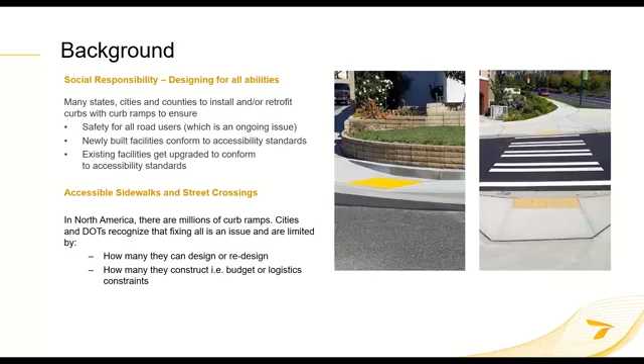So why did we decide to develop a software to help the designers? Well, just a really quick background on how we got started with this software itself.

Actually, a couple years ago, around two to three years ago, we started approaching a few of our clients to ask them what they found difficult when it came to designing curb ramps, or designing intersections and infrastructure. A few of them voiced their concerns and gave us their opinions, but one of the more prominent voices was Caltrans, and they expressed that designing curb ramps was actually very troublesome. Even though it's such a small infrastructure, designing it can take a minimum of one hour, and even the most complex one can take about a week or more.

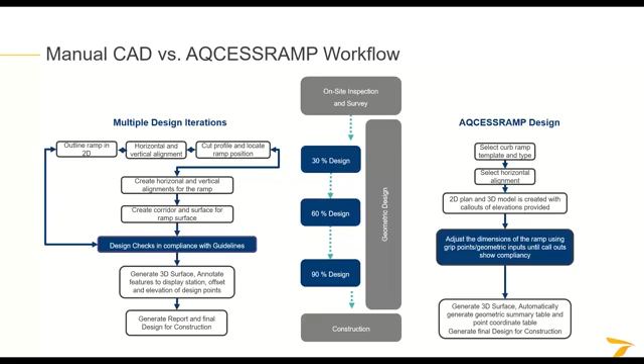So I mentioned that Caltrans was one of the prominent voices that we heard, and this entire software actually started off as a collaboration with Caltrans as well. But it wasn't just Caltrans that helped us out throughout this entire process. We actually had various DOTs have sneak peeks of this process. They would give us their opinions on what they liked, what they didn't like, and then we adjusted the software, made changes based off the various DOTs' opinions.

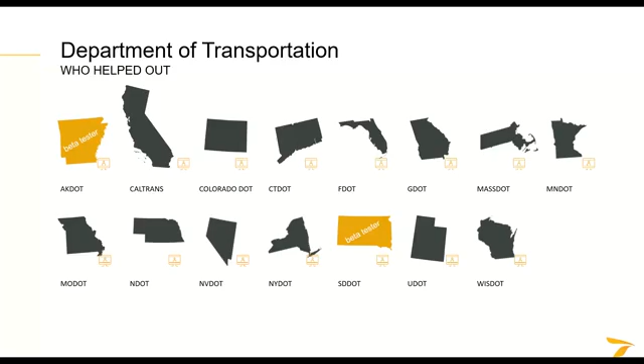We were actually very proud of it because the software was not just our software. It's actually a collaboration of many DOTs and many AEC firms as well, so that we're able to produce a software for the people that was collaborated and worked together with the engineers and designers throughout the entire development process.

Okay, so I did quite a few introductions of AQCESSRAMP already. I've provided you with quite a bit of information, but just a quick recap of what AQCESSRAMP is. AQCESSRAMP is a tool that will help you quickly and efficiently design your curb ramps. We provide you with a simple UI and workflow so that you'll be able to easily maneuver through the software.

You'll be provided with multiple workflows, so whether you're doing a brand new design or retrofitting an existing curb ramp or sidewalk, you'll be able to design 2D and 3D curb ramps at the click of a button. We have built-in templates for both curb ramps and curb types, so that you can mix and match to customize your curb ramps.

And with software feedback of slopes and elevations, you'll be able to know whether your curb ramp is compliant to whichever standard you're using, whether national standards such as FHWA, ADAAG, and PROWAG, or state-specific standards. And even if you're working with a city, you can create your own standards as well, which I can show you later on how to do.

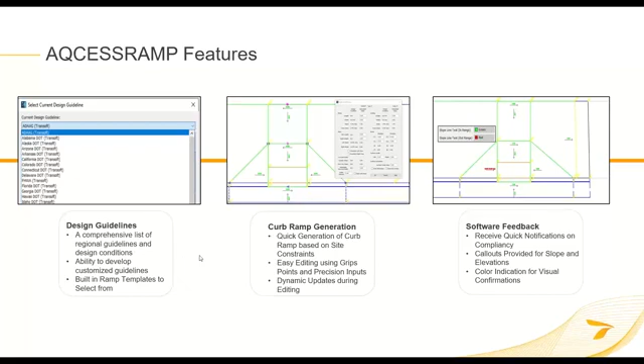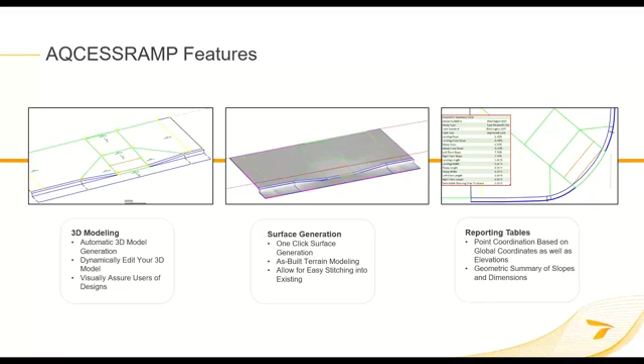Again, we have 3D modeling, 3D surface generation, and we also have reporting tables so the user can quickly grab their point coordinates for the key points of their curb ramp design, getting their X and Y as well as elevations. They'll also be able to generate a geometric summary report based off their curb ramp design that provides the geometry as well as the slope of their design.

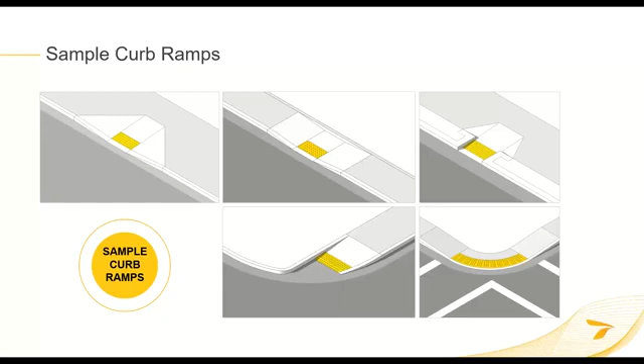And again, I mentioned we have quite a few guidelines from both the federal level and state-specific levels, and we actually have all 50 states in our software. We also have FHWA, ADAAG, and PROWAG in there.

So now I'll be jumping into the technical demonstration portion of today's webinar.

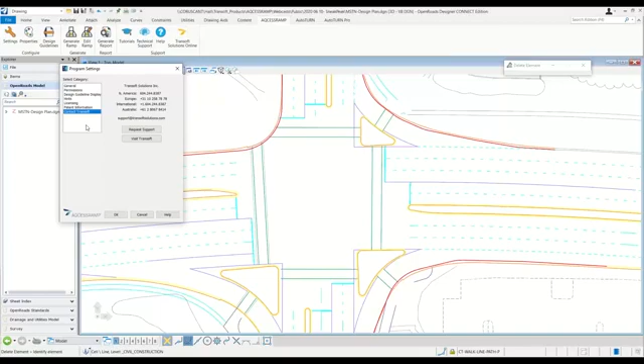Next, we have our properties. This is where the user is able to specify what level they would like each of the elements of their curb ramp to be placed on, whether you want them all on a single layer or a very specific layer, you can set them here.

As you can see over here in curb ramp, we provide the user the ability to specify colors and line styles, as well as the levels and transparency for the ramp, the landing, the curb, sawcut lines, the conform lines, the detectable warning strips, as well as the planting and boulevard. So if you have any state-specific line styles or colors that you would like to use, you can modify them here so that the curb ramp that's generated will conform to whichever standard you're using.

Same goes for annotation, for the elevation callouts and the slope callouts as well - you can set it all over here really quickly. And you can even save property settings and load property settings by simply extracting them, sending to another user, and they can just load it up over there.

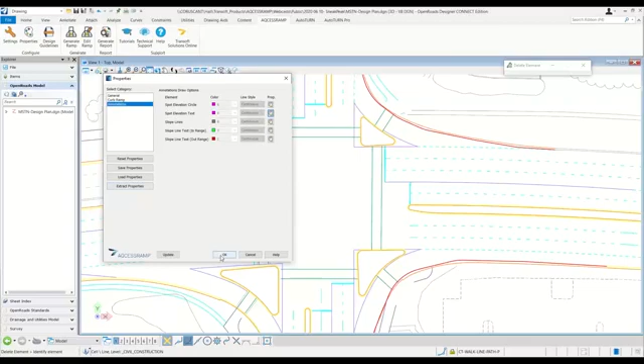Next, we have our design guideline. This is the main part of our software, the one that we're most proud of. As you can see, we have all 50 states, and if you view one such as Michigan DOT, you can see that we have quite a few various types available, such as type C, type D, and the F.

Rs, RF, and P - so you can see we have a parallel, we have the various perpendicular curb ramps, and using the directional, we can actually create a blended transition for the type D. We also have a few other various types. You can see that we can set the initial value so that right from the very beginning, you can already have a compliant curb ramp.

You can also set the type of curb you would like to use. In addition to the initial values, you can also set the design conditions - what's the minimum and maximum values that will allow your curb ramp to be compliant, and what's the minimum and maximum geometry and slopes that is acceptable for whichever standard you're using.

Such as for Michigan, we have a minimum width for the ramps and the landing, a maximum slope for the ramp, the cross slopes, even for the flares, and for detectable warning strips. These are all values that the user can set themselves. Obviously, for state-specific guidelines that ship with the software, we gray it out so that the users are not able to modify it.

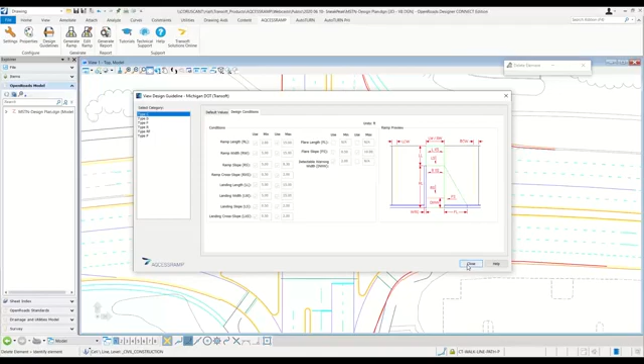However, if the user does want to modify or create their own, they can simply start a new one from scratch, or they can copy an existing one. So if they're to start a new one from scratch, let's say we want to create a new Michigan one - click OK, and we can add the various templates available. You can see over here we have the various templates for the users to use.

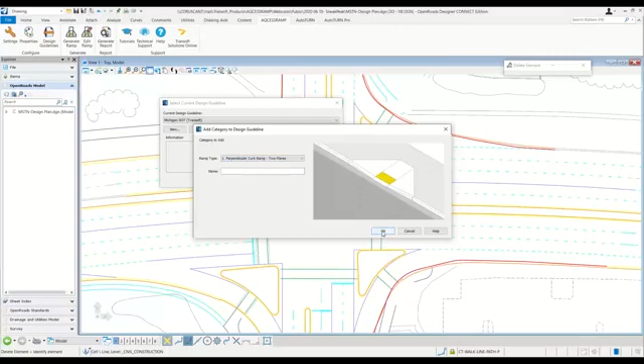Okay, and the user will just be able to simply click OK and put a name down for it. Let's just have a really quick, simple name.

And then they'll be able to start with the various initial values that they would like to use. As you can see, even for curb standards, we have quite a comprehensive list available. Even for Michigan, we have various curb templates available so you can mix and match depending on where you're designing your curb ramp.

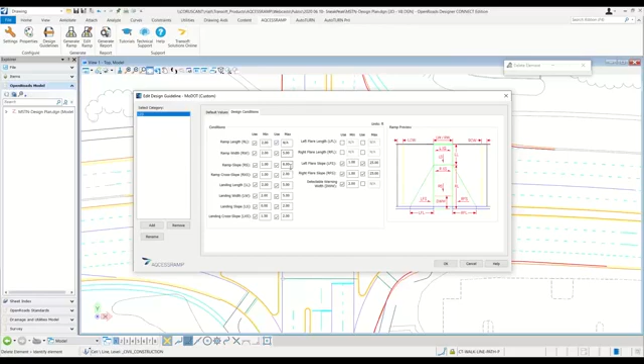Again, for design conditions, you can select which ones you want to use. If you don't need a maximum, you can select it off, turn it off, but you can set in the actual values yourself. So that's all very, very easy for users.

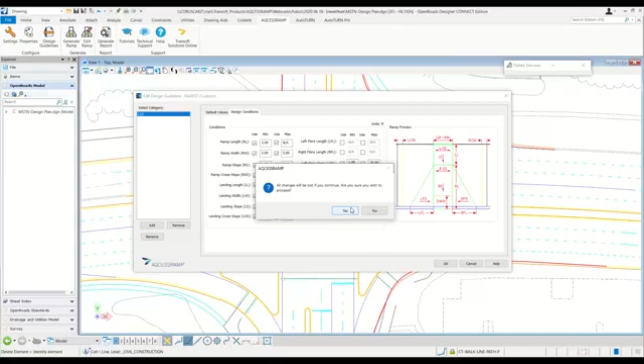We have state-specific standards, but we understand some counties or cities have their own standards as well. So you can actually create your own standards for the city or county. Or if you're not sure how, or you're having troubles creating your own standard, feel free to let us know which city or county you would like your standard to be for, and we can actually create it for you and send you a file for you to simply import into your own workstation for you to use. And even yourself, if you create one, you can simply export it so that other people can use it too. So that's very easy for you as users.

Okay, so we're going to close it here. Next, we have the ability to generate and edit the curb ramp, and then we have the tool to generate the report. So we need a curb ramp to be able to generate a report. We also have the tutorial, so we have quite a few tutorials for users to use. For when they're first starting, it will just take you through the steps of generating a curb ramp. And then we also have the technical support and a help section. So if there's any terminologies or features that you're not familiar with during your design, feel free to go into the help section and you'll be able to look it up.

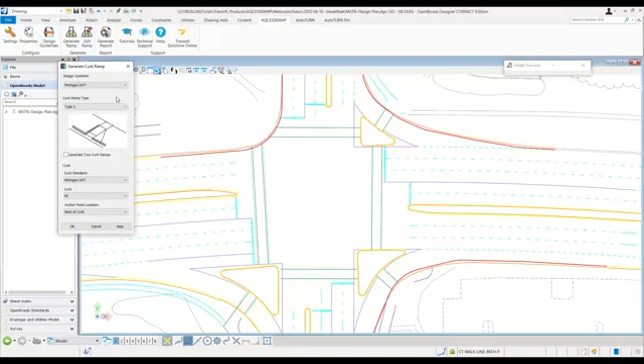All right, so let's get started with the actual generation portion of the software. So we're going to generate a curb ramp. As you can see, with Michigan, we can decide which type we want. Let's go with the simple type R. So let's go with an R. Okay, let's go with type F, the most basic perpendicular curb ramp, just to show you guys what we're capable of at the moment.

Again, we can select which curb standard we would like to use, which curb type, and then we can select the anchor point. The anchor point means that the curb ramp is anchored to the curb geometry, but what that curb geometry represents is up to the user. So they can select if they want to represent the back of curb, the face of the curb, the flow line, or in some cases a gutter edge if they want. So we can select a gutter edge if we choose to do so.

And we also have the ability to generate two curb ramps at once. So if you're at a corner where you need to generate two curb ramps at once, you'll be able to do so right at the very beginning, and you'll be able to edit them dynamically. I'll show you that later on as well. Okay, so click OK.

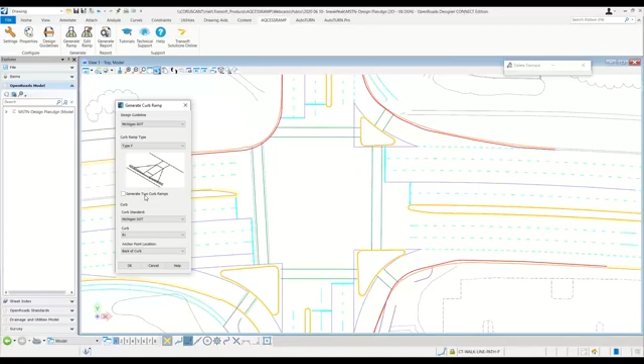So now we'll select our curb geometry. Whether you're using a line string, complex chain, or horizontal and vertical alignments, you'll be able to use our software. So if you're trying to do something conceptual, such as you just want to start off with a simple line, you just draw this line to see if it works, you'll be able to do so as well. So I'll start off with a simple line here.

And the software will ask me if I want to use a vertical. So this is actually a horizontal alignment that I'm choosing right now. I didn't realize it was an alignment, I thought it was a simple line string. But since it's an alignment, we have a vertical profile, so we'll be attaching the vertical profile to it. We'll click OK.

Next it will ask us to select a back of walk alignment, but since we don't have one because we're doing a brand new design, we don't even have sidewalks here yet, so we'll offset our primary geometry. The reason we have to offset our primary geometry is because our software requires a line there, but this can be considered a construction line. It's just that we require 4 sides to form a group, because we need a group to have intelligence for our software.

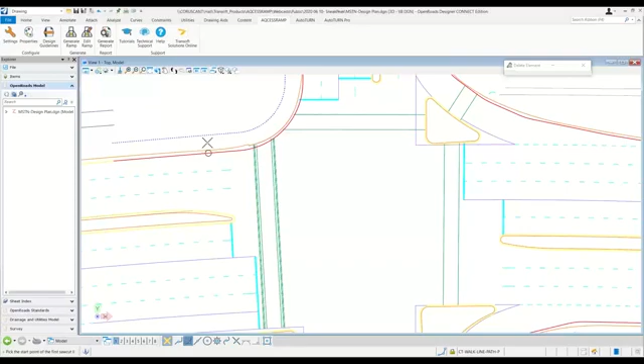Next we'll place the other socket line on the other side, and then we can just drop in our curb ramp. So I'll drop it in right there. You can see right off the bat our curb ramp was dropped in, and the curb ramp is currently anchored to the back of the walk, the back of the curb.

So you can see there's a flow line, and there's my curb and gutter. I believe this is a mountable curb, that's why it's showing like this.

And you can see that there's various grip points that the user is able to use, so I'll go through the various grip points. Bear with me, it does lag a little bit due to the fact that OpenRoads is constantly saving the line work. So starting from the back over here, as you can read, it adjusts the curb ramp's angle. So if I were to move the mouse, and we wait for it to load up, or we can accept it, very soon you'll see that the curb ramp's angle has been changed to fit the new specified angle.

Hold on a second, it is currently still registering, it's constantly processing. So there you go, we're able to change the angle, right? We can also change the landing length, so we'll adjust the landing length from there.

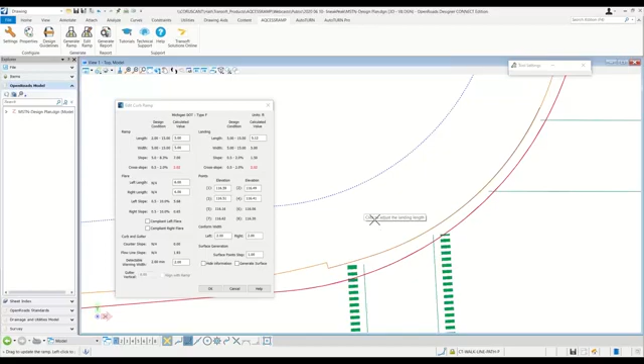And obviously we can go through the various other types as well. We do have grip points that will allow you to change the width of the curb ramp, the length of the ramp, the flare length, as well as move the location of the ramp. So as you can see over here, we can adjust the ramp's width, adjust the ramp's length. We can move the curb ramp, adjust the flare length, and even near the socket line, we can move the socket line. We can also change the angle of the socket line as well.

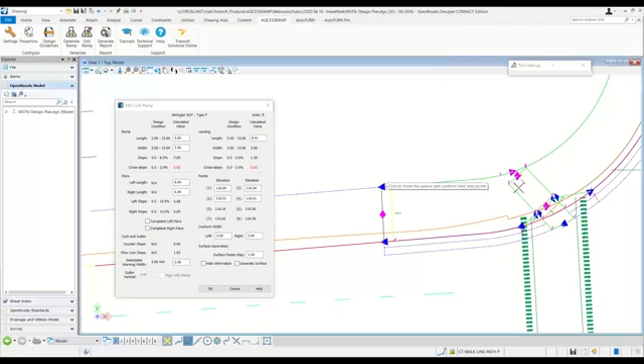So obviously using a grip point, it can be a little bit laggy. So what we actually allow the user to use... sorry about that, I accidentally exited out of it, so I'll be reselecting my curb ramp for the editing. Is that we actually allow the user to do precise inputs.

So if you're the user and wish to have a certain length for the ramp or a certain length for the landing, you can actually specify 6 feet, and just like that the software will adjust dynamically. Even for the ramp, let's say I want to widen it, so I'll widen it to 6 feet as well. You can see right away the software will update everything for me.

And even for the flares, I can adjust it according to whatever I want. And even for the slope calls available, as you can see, some of them have numbers. All of them have elevations, but some have numbers that correspond to the dialog box over here that you can actually enter a precise value for.

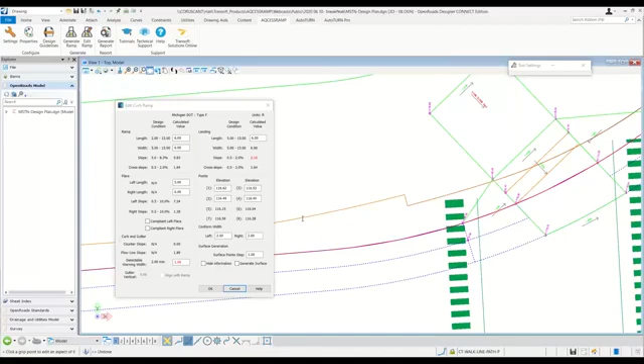We even allow the user to specify the detectable warning strip width, so if they want it only 1 foot wide, they can. Same for conform width - if you have a surface, our software will have a transition area from the design surface to the existing surface. That's this yellow strip, which we call our transition or conform width, and the user can specify the width of this as well.

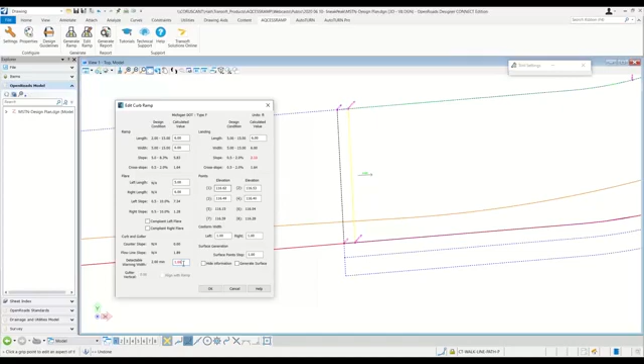You can probably notice the moment I change the detectable warning width from 2 feet to 1 foot, the dialog box turned red, because the minimum detectable warning width is actually 2 feet, and I specified 1 foot. So that means I'm not compliant anymore.

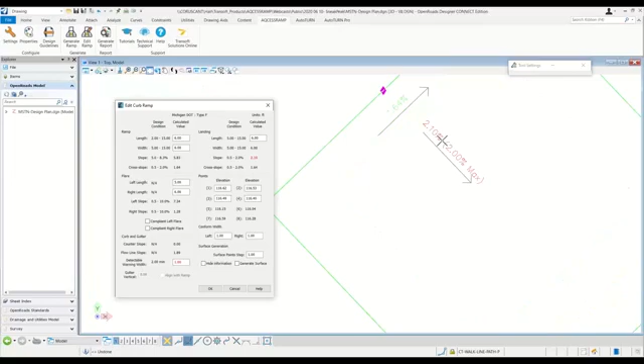Even the dialog box will show red for values that aren't compliant, such as for landing width or landing slope - the maximum is 2%, and right now I'm sitting at 2.1%, so it's red. You can even see in the curb ramp the callout became red, saying the maximum is 2%. Based off that, we can make adjustments, such as turning this to 7 feet, and just like that, it's compliant again.

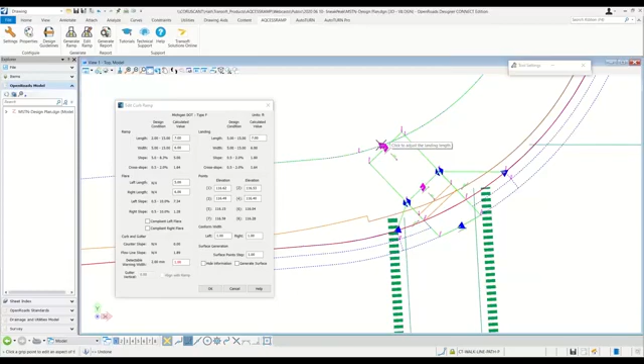So even for landing, for all of these, we can change the value. You can see very quickly I can edit my curb ramp, and if I want, I can just adjust the landing length again to make it go back to normal.

So that is the perpendicular curb ramp, or for Michigan, it's called a Type F. Now I'll be showcasing the other types of curb ramps available. I'll click OK for this one to exit out of the editing phase.

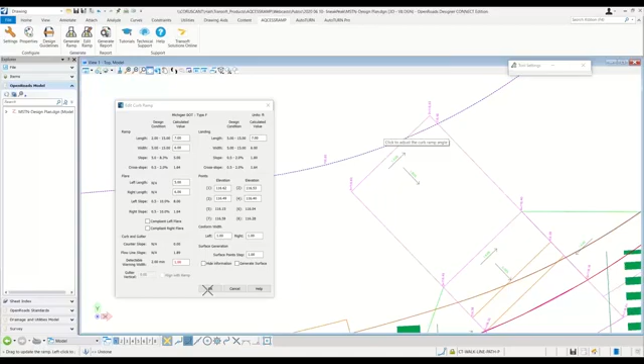Before I continue with the other type of curb ramps, I'll generate a quick report for this. As you can see, we have a point coordinate and geometric summary table, so we can quickly create a point coordinate table out of it, include our elevations, do this for construction, and it'll export as a CSV file that we can then open up.

Oh, sorry about this. I accidentally exited out of there.

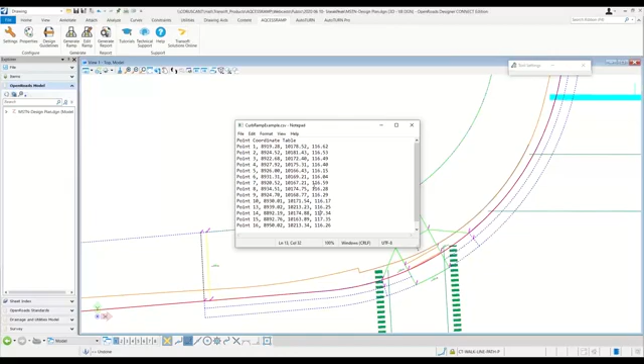Here's my point coordinate table. You can see point 1 gives me X, Y coordinate and the elevation as well for all of them, so you can provide this, or even add this into your drawing file if you need to provide it for the contractors.

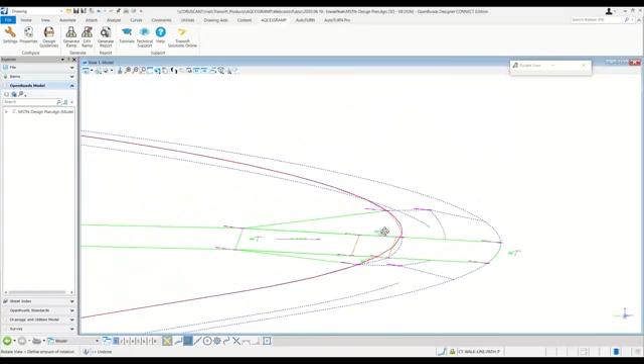I'll pan this over so you can see the 3D model. Over here is our 3D view - the curb is shown, and you can see the curb ramp 3D model. There you go, I'll go back to top view.

Next, I'll be showing the other types of curb ramps, so I'll delete this one for now. I'll keep this construction line so I can show you the various other workflow. This one I offset - it's just a complex chain, so that has 3D data to it.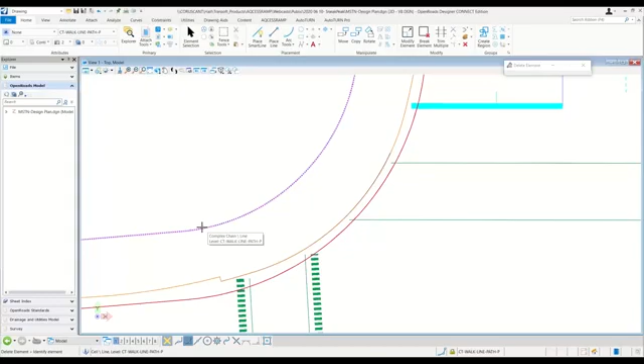It is still a construction line, but as I said, for my next example I'm going to be utilizing it. If I pretend that I have an existing sidewalk, I can use that as my back of walk alignment.

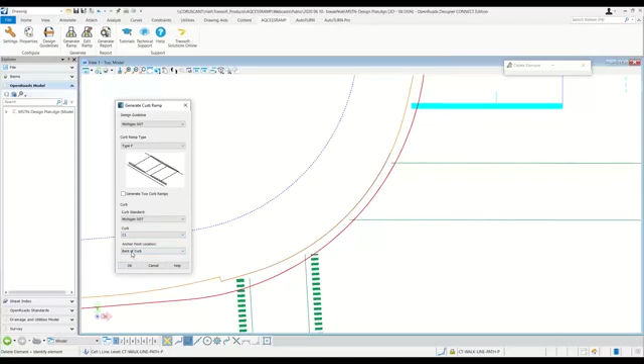Let's go with a parallel curb ramp - let's go with a C1 curb. We'll click OK. Let's pretend for this case that we don't have any 3D elements to it, that everything's elevation is set at 0, because we're just doing a conceptual design.

We'll still select the same line, but instead of using the vertical profile, we can actually select a fixed elevation, so we can specify the elevation we want, and click OK. We'll select our complex chain for secondary geometry.

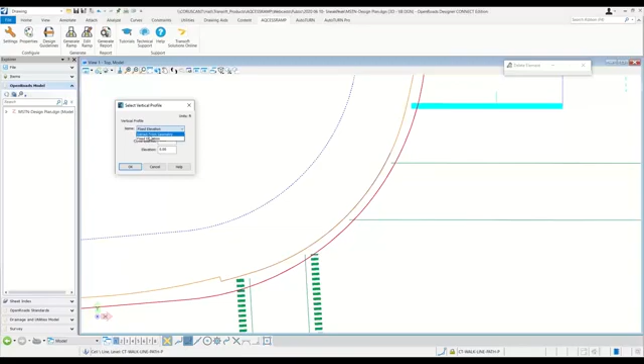We can either extract from geometry because it has elevation or 3D components to it, or we can do a fixed elevation. If you have a 3D line string or a complex chain that's 3D, we can extract the geometry from there. You don't have to have vertical profiles or actual alignments to have 3D components. You can just extract from the geometry of your complex chain. But we're going to use a fixed elevation.

Click OK. Again, we're going to specify the socket line, and then specify the location of our curb ramp. So you can see right off the bat, our software will generate the curb ramp. A lot of things are not compliant right now, so everything's popping up as red that the user can then edit using our software to make it compliant.

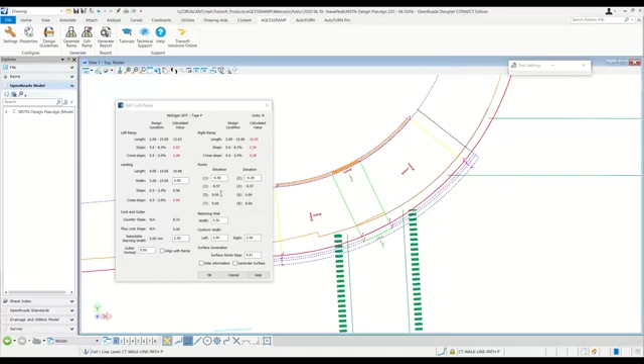The dialog box is slightly different, but it still works the same. If I were to pan this over to 3D, you can see that it is now 3D. It is a 3D model. It even has a retaining curb on the back, and the curb geometry at the front as well for the curb type that you have selected.

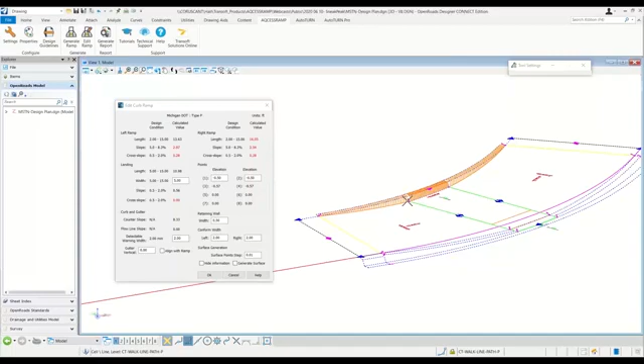So this is our parallel curb ramp. You can see right off the bat it does generate for you, even a 3D model, so you don't have to manually draft any lines or manually do any of the edits. Even especially the retaining curb in the back, everything updates dynamically for you.

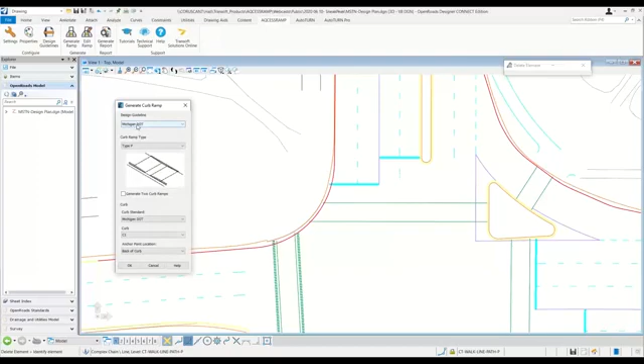Click OK for now, go to top view. So the next one I want to show you is actually the Type D. I'll be showing the blended transition, still using the same corner. So click Axis Ramp again, generate a ramp, and then we'll click Type D. This is the blended transition.

Click the curve geometry again that we want to use. We'll use our vertical profile for now. We can offset the primary geometry, offsetted by, let's go with 13 feet for now. And we'll offset it like that. I do understand it's not the best offset, so we needed to accept it.

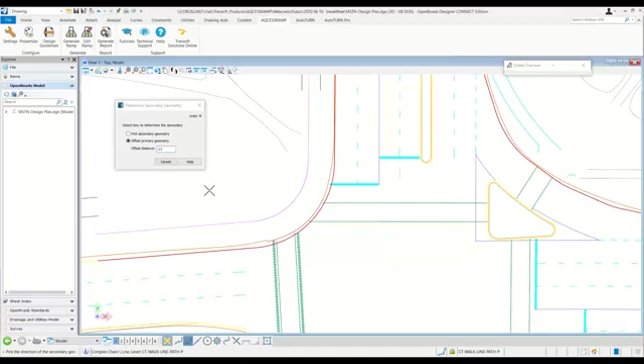We'll specify our socket line, so we'll go somewhere further away, and we'll select something here as well. Then we'll select where we want our blended transition to be placed at. You can see right off the bat it'll generate two technically directional curb ramps that the user will be able to edit.

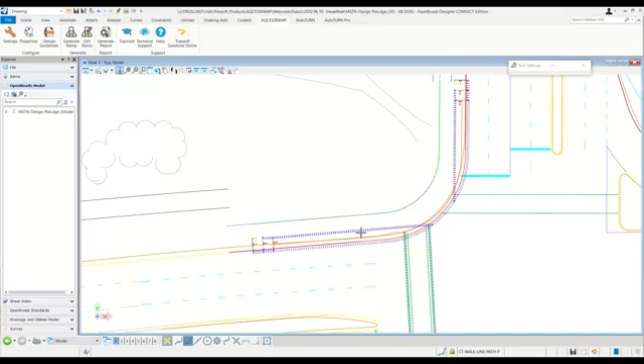Oh sorry, I right clicked out of that one, so I'll go back to editing. Using grip points, we'll be able to edit it to make it into a blended transition. So we'll quickly drag this grip point out.

Again, we'll have to wait a little bit for it to work. We'll go to the other side as well and drag it out. Okay, hold on a second, give it a little bit of a moment. Hold on, give me a little bit more time.

It is because this is OpenRoads, that's why it does lag a little bit, as I mentioned. It's constantly saving the line style. Oh shoot, hold on a second. Okay, there you go. Come on, hold on a second, sorry about this. It just jumped out of there for some weird reason, sorry about this. It is taking a little bit of time to be able to generate it.

So while we're waiting, I'll answer a few questions. One of the questions I was asked is about line styles and color options.

Hold on a second, it actually crashed on me, so I have to load it up again.

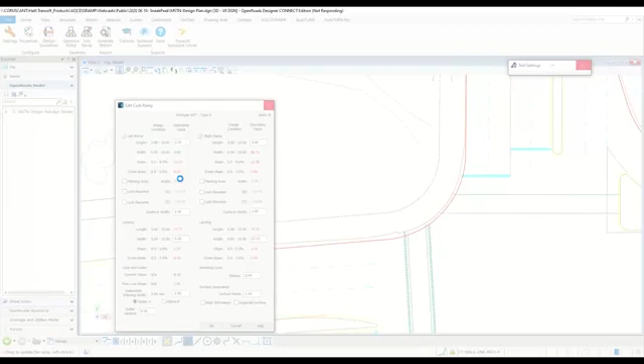I'm pretty sure we're all familiar with CAD softwares. It does lag, it does happen, especially when you're using OpenRoads Designer. The amount of processing going on in the background, the amount of tasks it's comprehending right now, it will take a little bit of time.

Another user has asked, do we need to have the existing surface before we can start designing? Honestly, you do not have to, but you can if you choose to. If you have an existing surface, it's nice because you can merge it into your existing one. But if you don't have one, you don't have to use it. It's just another option that will get you to your final design, or to your as-built or recorded terrain in the end.

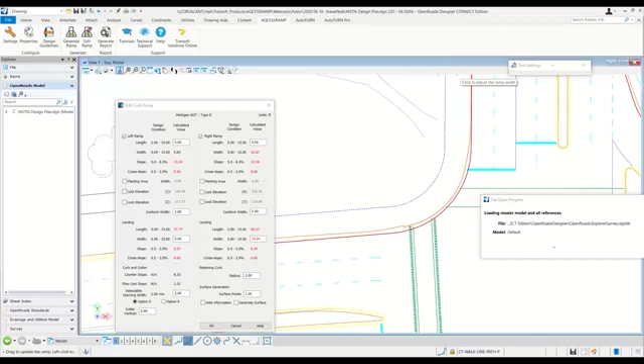I have to adjust again, it didn't process. But our software can generate a surface for you of your curb ramp design, so I'll show you that later on. Sorry about this, it's currently processing on the other end as well, so I wish to turn that off. It's taking a little bit of time to process.

I know this is very unconventional, and because you're Bentley users I wouldn't wish to do this, but I'm going to jump into Civil 3D for now because it doesn't save for me, so it can actually load slightly faster. I know this is very unconventional, sorry about this, but just so I can show you guys what it's capable of doing—it is the same for OpenRoads, it does do the same tasks.

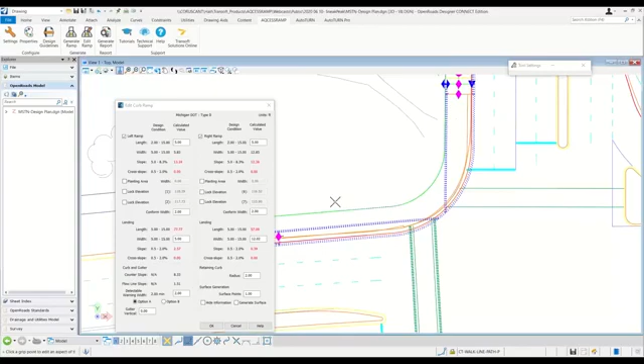Oh, actually it just loaded for me, but it did take a little bit of time to do so. Sorry about that. So again, I'll have to adjust the other one to make it work as well, to get that blended transition. While we wait, I'll show you on Civil 3D as well, so you can see what it's supposed to look like and what it's capable of doing.

Okay, so let's boot up Civil 3D. Sorry about this, everyone.

As I was mentioning before, for the surfaces, as you can see during all the examples I've done, I haven't used a surface once. If I have one, I can choose to use it, but because I don't have one, or don't need to use one, I have not been using one. So you don't have to worry about having surfaces or anything of the sort. Sorry about this, it's taking quite a while to load both of them at once.

If there are any other questions, please feel free to keep typing them in—I can keep addressing them while we wait or load up our softwares. Okay, this is a Civil 3D example. Let's see how OpenRoads is doing on the other end. It's still loading, okay. Sorry about this, it usually doesn't happen.

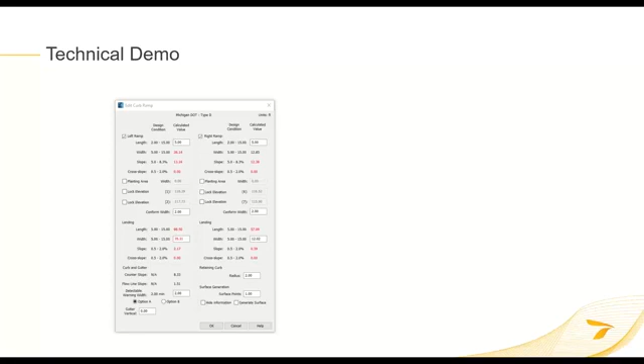Jumped out again. Come on, bring me back in. Okay, so while we wait for OpenRoads to load up, even Civil 3D is giving me a hard time. I'm not sure why—guess it just doesn't want to cooperate first thing in the morning. Sorry about this. Ignore that.

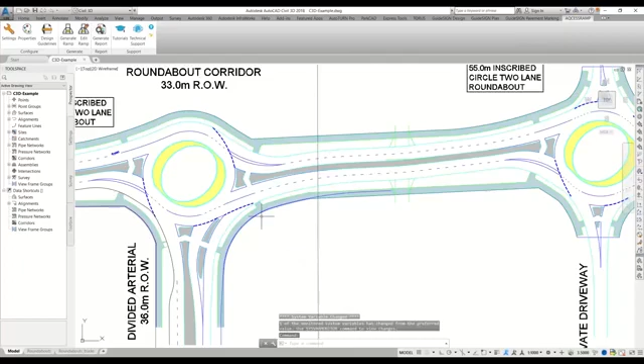Okay, terrific, here we go. So I'll just do a really quick example on the side over here for blended transition. Sorry about the fact that this one's just taking a while to load up for me. So that's how to use Civil 3D to demonstrate for now, but the process is exactly the same.

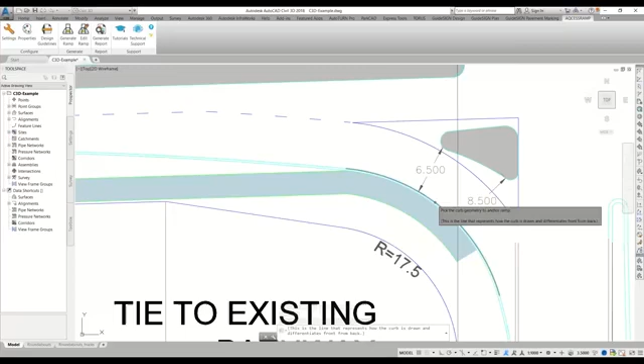Okay, so now I can generate my ramp. I'll click to generate, click generate ramp. Again, I'll go for Michigan, click OK. I'll select my... okay, let's just use something, let's use this one down here, let's use this intersection. We'll do a fixed elevation again, we'll offset the primary geometry, and we'll do something bigger.

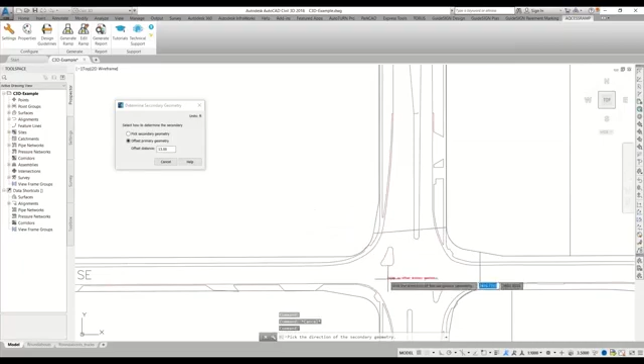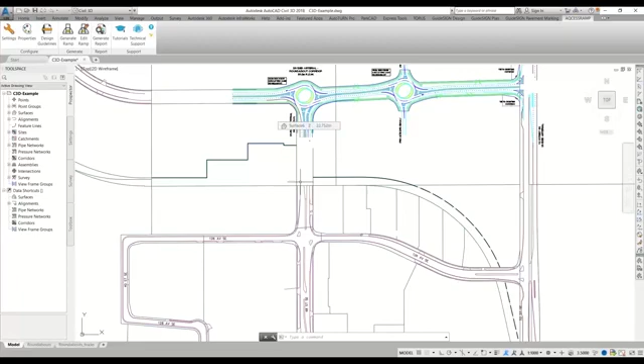Come on, pick secondary geometry. Offset it. Sorry about this, it's very troubling, that's not processing very well for me. So while I'm waiting for both of these to process, right now OpenRoads is actually causing my Civil 3D to lag as well, which is kind of sad for me.

So while we wait, someone has asked, does it recognize the diagonal slopes? The answer is unfortunately no, it does not. It only recognizes the cross slope and the running slope.

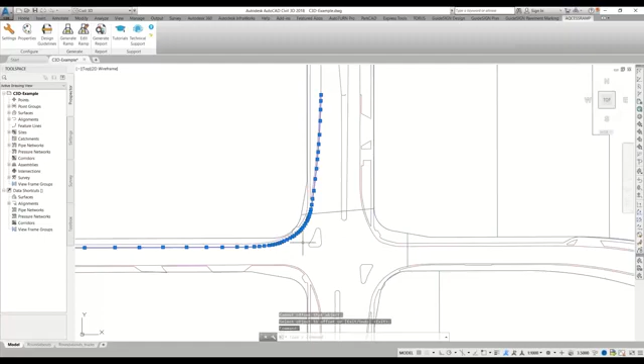Okay, so I'll offset something here. Did not process for me, sorry about this. So yeah, it doesn't flag the diagonal at all, it only flags the running and the cross slope. So when you're designing, you just have to keep in mind that you still have a diagonal slope to be aware of as well.

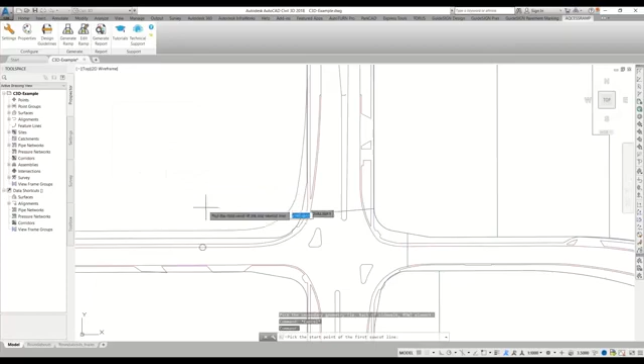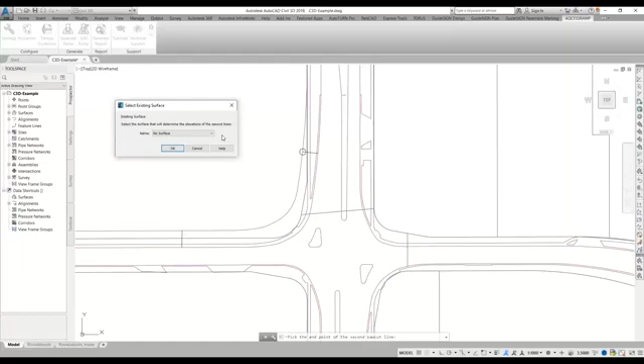Okay, so I'll again do my sawcut lines. At this point, if I have a surface, I can use it, if I don't, I don't have to use it. This is where our software is able to tie in the design surface to the existing surface. So again, I'll press OK for this one. I'll delete the other lines for now just so it doesn't clog up, just so it doesn't look as messy.

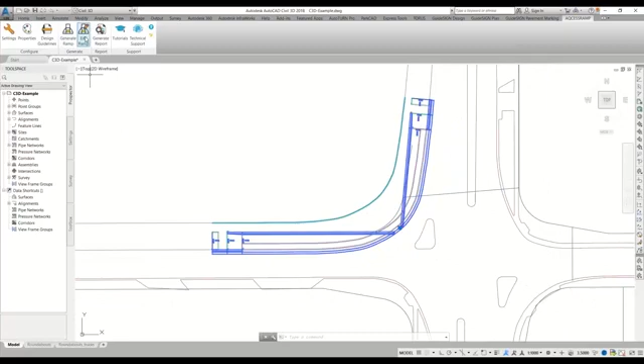Okay, there you go, so here's our curb ramp. Again, we'll just edit it, we'll use grip points to adjust to create that blended transition. Just like that, we'll be able to adjust it. For our ramp length, we'll move it closer together. And even for the radius over here, you can see that's pretty sharp. In our dialog box, we can actually edit the radius, so let's go 10 feet for now to make it more rounded. So you can see right away, this is what a blended transition would typically look like.

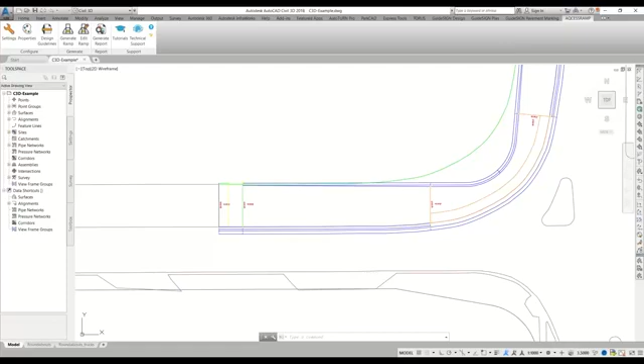Let me delete these lines so that it looks cleaner. So here's our blended transition. If I were to pan over to the side, you can see the dialog box, the ribbons, everything is the same whether I'm using OpenRoads or Civil 3D, everything's exactly the same. And this is my blended transition curb ramp. So you can see there, even from side view, there is a slope heading down until I hit my landing. And I have my retaining curb on the back over here, and my slope callouts are provided over here to let me know if I'm compliant.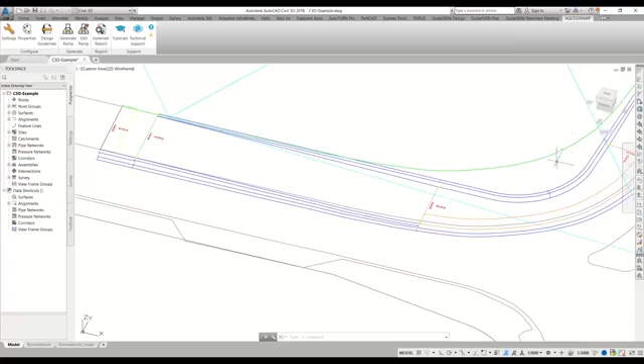So again, I'll click here, go top view, and let's see if this one's still not loaded. OpenRoads is really not cooperating with me today.

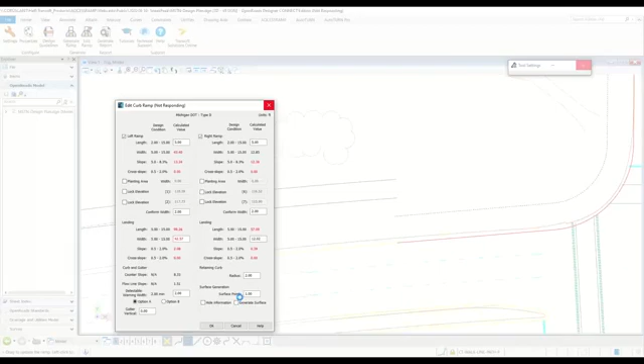Okay, but as you can see, like even for the OpenRoads Designer and for Civil 3D, there's a generate surface button that you can click, you can just simply click to generate the surface. Sorry, I wasn't able to showcase it that well on OpenRoads Designer. It is lagging a lot this morning for some really weird reason. It usually doesn't happen like this, but it is lagging a lot right now. All right, so sorry for that.

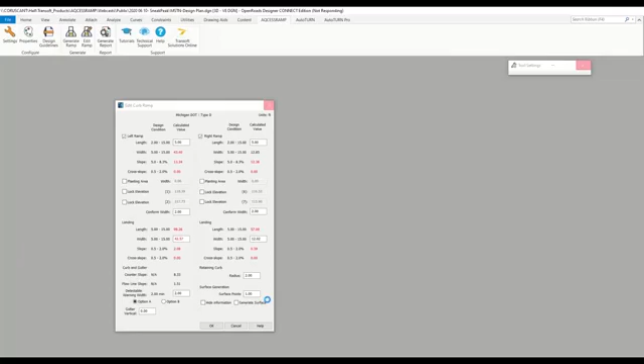Okay, so I wasn't able to show you the final product in OpenRoads Designer, it's very unfortunate. I was able to get the perpendicular and parallel curb ramp going in OpenRoads, but I wasn't able to do it for the blended transition due to the amount of processing that's happening in the background. So right now, OpenRoads isn't even letting me select anything anymore. All right, so okay.

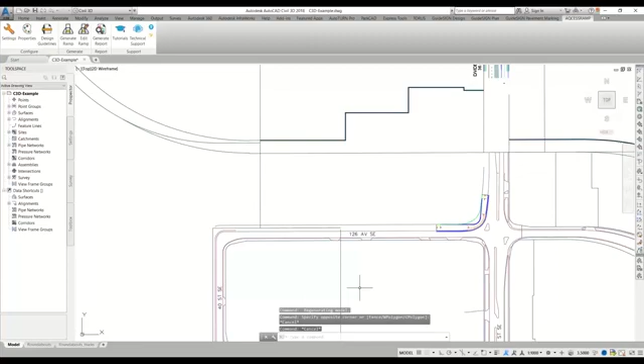So the system requirements, so you saw me use OpenRoads Designer, you've seen me use Civil 3D. We are compatible with MicroStation V8i and Connect as well, and also for AutoCAD. And for OpenRoads Designer, we are compatible with the latest updates, so the 2020 ones. And for our system requirements, Windows 7, Windows 8, Windows 10, we're compatible with all of them as well.

Okay, so I'll be answering some questions. Tala has asked, do you have any settings in the software that can control the gutter slope, the roadway drainage slopes? I'm glad you asked. So if I go back to the dialog box, we don't have an exact way of editing the gutter slope.

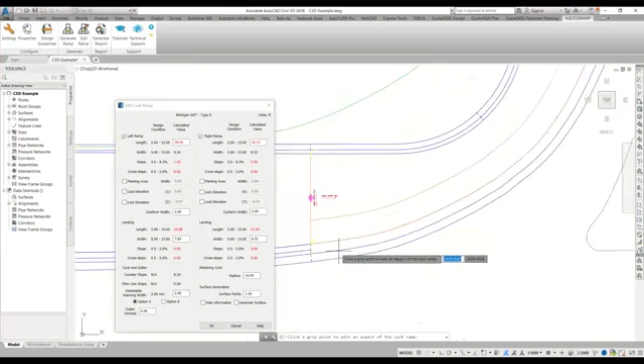Our gutter slope is not something you can just enter the slope value and hope it works. Our workaround is that we allow the user to set an offset. If I pan over to view the gutter, currently it's at 0%. The user can set a vertical offset, anchored at the flow line, and offset this gutter edge.

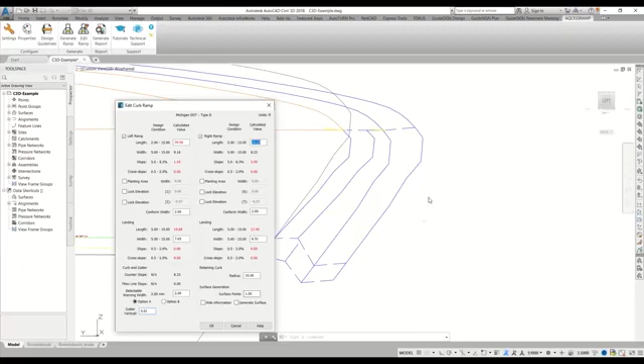If I were to change this to 0.1, you can see the gutter vertical will change dynamically. Let's do something more drastic. You can see the gutter vertical does change, and with it, the counter slope or gutter slope changes as well.

If I go back to 0, the gutter went down, and right now it's set at 8.33%, lined up with the ramp slope. If I were to go down 0.05 feet, that's still going up. If I put a negative sign, now it goes flatter, at 0.87%. So that's our current workaround for our software to control the gutter slope that the user can use.

Next, a user has asked what's the approximate cost of the software. At this point, I'll unmute Majo so that he can jump in here.